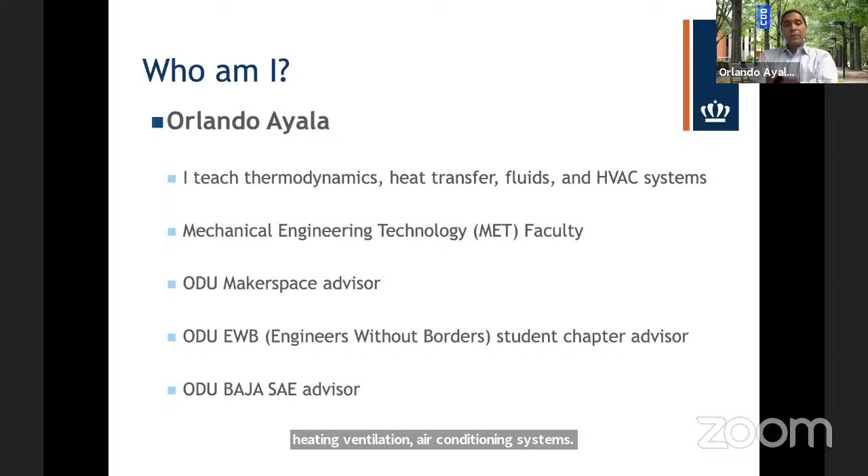So who am I? Like I said, I'm an associate professor at the Engineering Technology Department. I am a mechanical engineer by training. What do I do here? I teach thermodynamics, heat transfer, fluid mechanics, and HVAC systems - heating, ventilation, and air conditioning. I'm part of the MET faculty, the Mechanical Engineering Technology faculty. And I'm proud to say I'm also advisor of some nice student organizations at Old Dominion University: the Makerspace, Engineers Without Borders, and the Baja SAE. I'll tell you more about those three in a second.

I've been blessed in my professional life to be involved in so many areas of application of engineering. I'm faculty right now, so I'm dedicating my life to the academic side, but I used to work for a company - a consulting company. I used to work in the industry, so I know exactly what goes on there. I was trained as a mechanical engineer, did my master's degree, and got my PhD in 2005. I went to work in industry for several reasons, and I had the nice opportunity to use what I learned there. When I teach my classes, I always try to bring all the experiences I had in the industry.

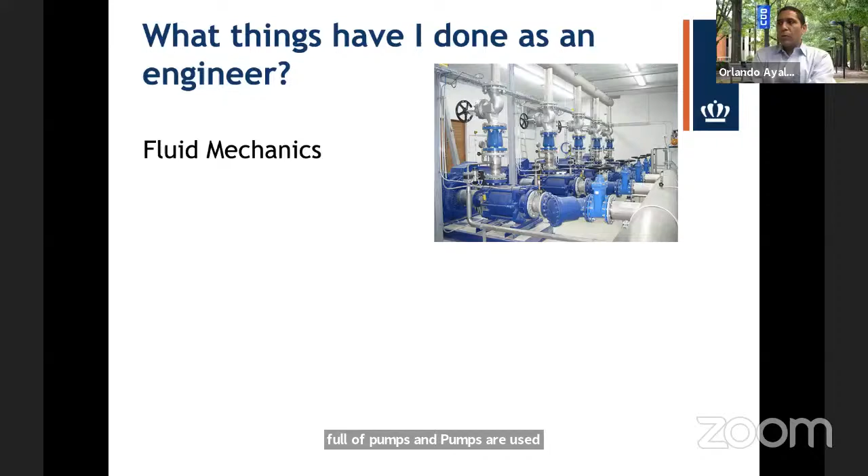On the fluid mechanics side, I design things like the ones in this picture. That right there, you see a room full of pumps, and pumps are used to move fluids from one point to another. Everything you see in that picture, although this is not my own project, we design - in my time working for the consulting company.

One of the coolest projects I was involved with was a large swimming pool we were hired to design. We work alongside architects, civil engineers, electrical engineers, and so on to design a very large swimming pool. The larger the pool, the more mass of water you have to move, the larger the pumps you will require. I don't know whether it was built or not, but I designed the swimming pool.

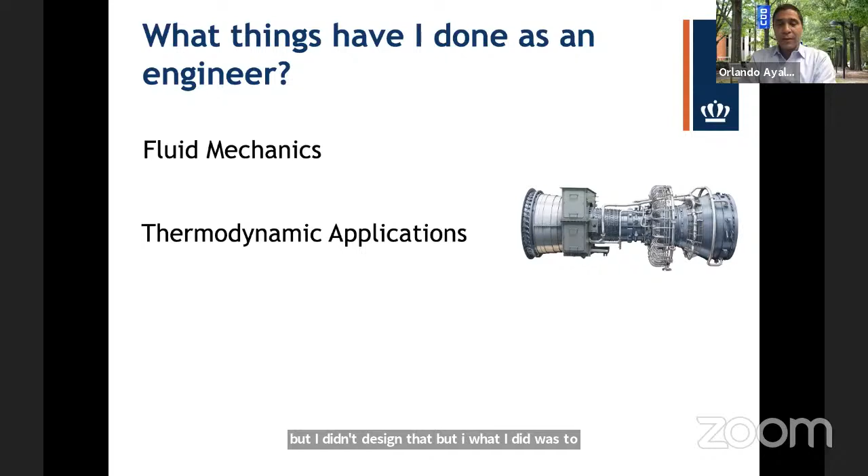That right there is a turbine, the same turbines we use in an airplane. But I did not study the turbine in an airplane, what I did study was a turbine in a power generation plant. I looked at the performance of that turbine to see how it was working, to detect any possible current or future failures. Because when equipment is about to fail, there are parameters that change, and if you read them ahead of the game, you could prevent the failure.

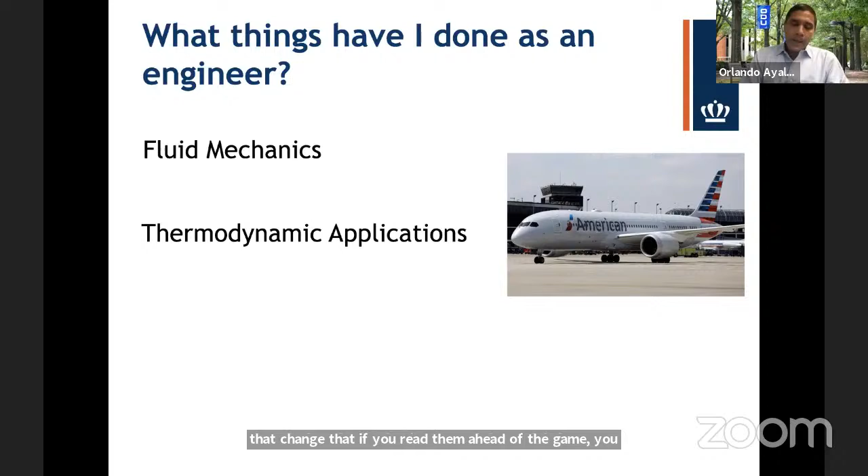Similarly, I also look into engines, but not the engines of a car. By the way, the fact that I am a mechanical engineer doesn't make me capable of fixing my car. I don't know how to fix my car, I know how it works but not how to fix it - we need a mechanic for that, they know much better than I would. I did not study the engine of a car, but I reviewed the performance of an engine in a particular plant in the industry I was working on.

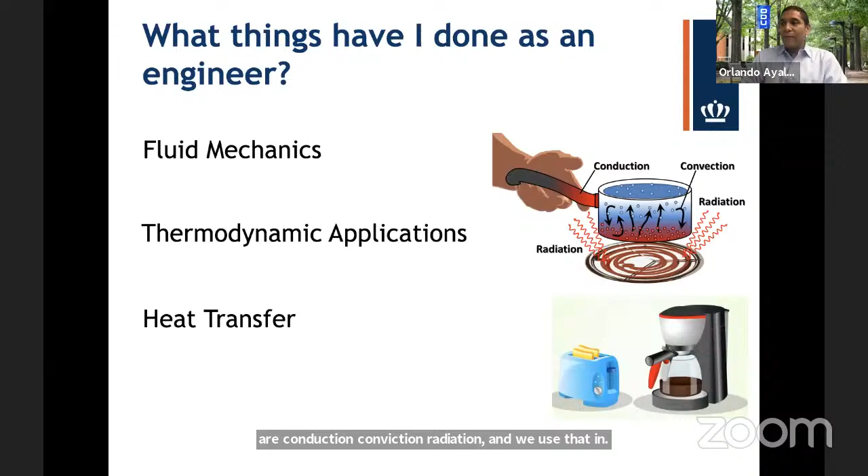Another side of my expertise is heat transfer. Many of you might have heard about the different heat transfer phenomena: conduction, convection, radiation. We use that in common things in our house, and in cooking heat transfer is extremely important. But the one I have dedicated a lot of my time to is computing the heat that could go into a house during summertime.

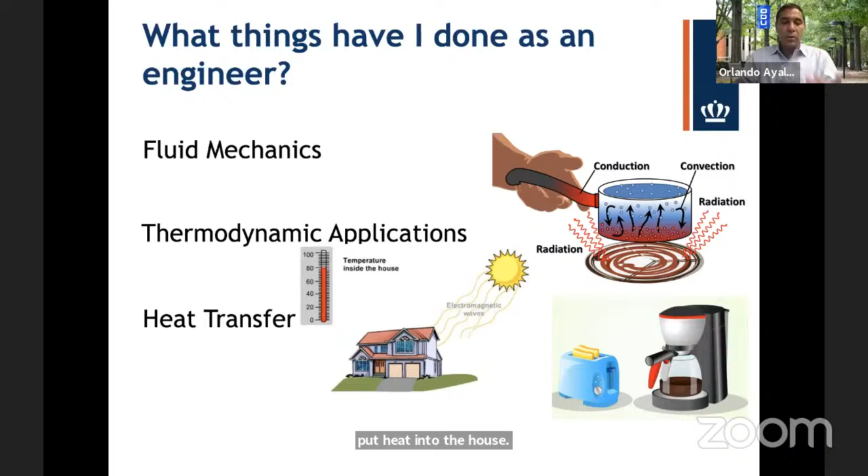If it's summer and really hot outside, we want our house to be cool. But nature will put heat into the house, because heat always goes from high temperature to low temperature. So this is where an air conditioning system comes into place, to remove that heat that Mother Nature puts in the house.

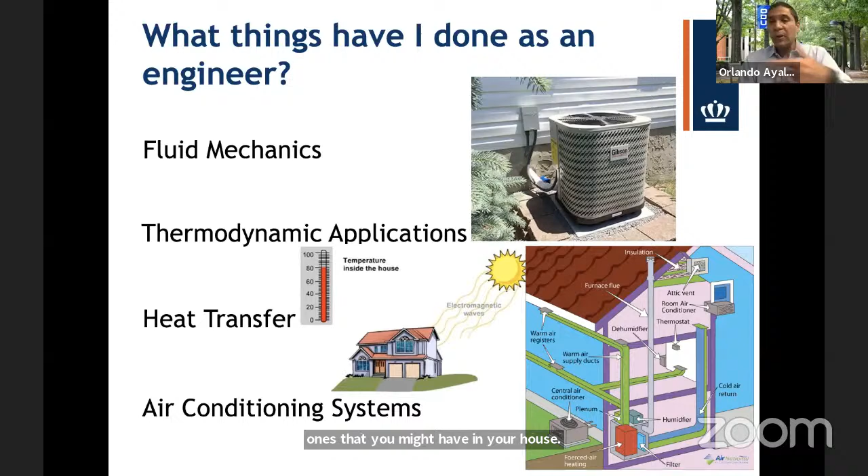So in my engineering practice, I have also designed systems of this kind, the ones you might have in your house. Anyway, those are the things in general that I've done in my life as a professional mechanical engineer.

What have my students done? What do they do while going through their careers here at Old Dominion University? Well, I advise 3 student organizations that I'm so proud of: Engineers Without Borders, the Baja Car Club, and the Makerspace. Let me start with the Makerspace. I'm broadcasting from the Makerspace, by the way, which we call the EMIC.

In the Makerspace we have a huge space with lots of equipment the students can use to fabricate and create things. The idea is for students to come here, come up with their own ideas, design them, and make them - that's the word Makerspace. We have 3D printing, a metal area, a wood and composite area, a welding area, and an electronics area. We have any sort of equipment students could use for free to build their ideas.

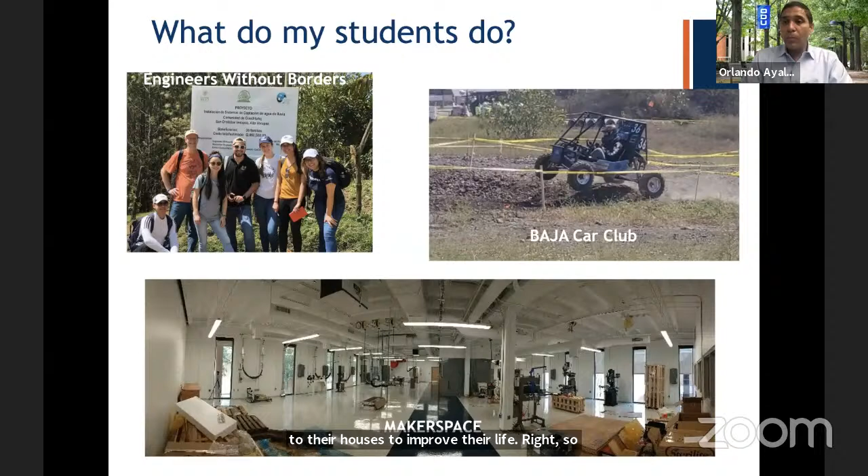So what we're doing is designing a pump system that can take the water from that source directly to their houses to improve their life. That's what we're doing around here, at least my students, with my advice.

Before I go into the class, I gave you my background, and now you know me a little bit better. Let me tell you something I'm going to come back to every now and then as we go along in this class: engineers are designers and/or inventors. We could be inventors and we design the invention. One thing is to invent something, coming up with an idea—the light bulb goes on.

That's an idea that you need to design. So not only do we as engineers come up with that idea, but we also design that idea. We make it happen. That's why we are designers and inventors. Now, what is important to recognize here is the following.

Scientists study how Mother Nature behaves, and they come up with mathematical equations, mathematical models. That's their job. We as engineering practitioners don't develop equations—what we do is use those equations that scientists came up with. Whatever they learn from Mother Nature, we use that to our advantage because we want to fool Mother Nature through devices to improve our life.

Like, for instance, the air conditioning system. A scientist found out—by the way, his name is Fourier—many years ago, that heat goes from high temperature to low temperature. He developed some equations to quantify that amount of heat.

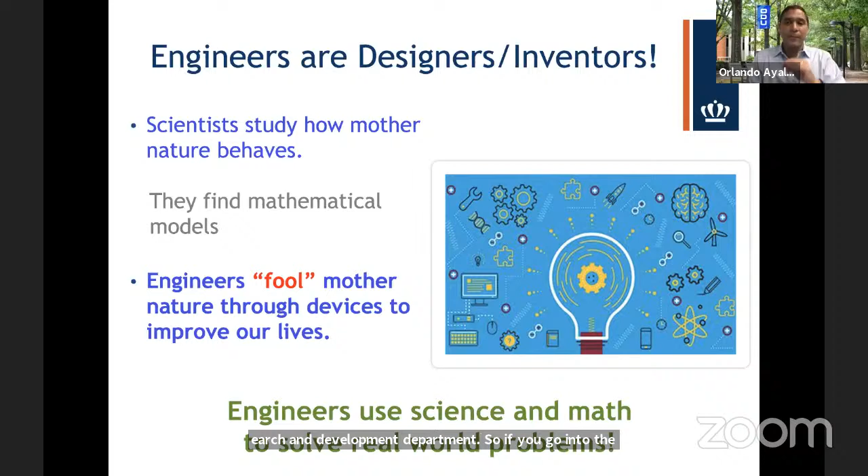There are many companies that have research and development departments. If you go into a research and development department, you are an engineer that goes more into the scientific side—you could also come up with equations if you like, spending your life studying Mother Nature. Or you could go into the industry just to solve problems.

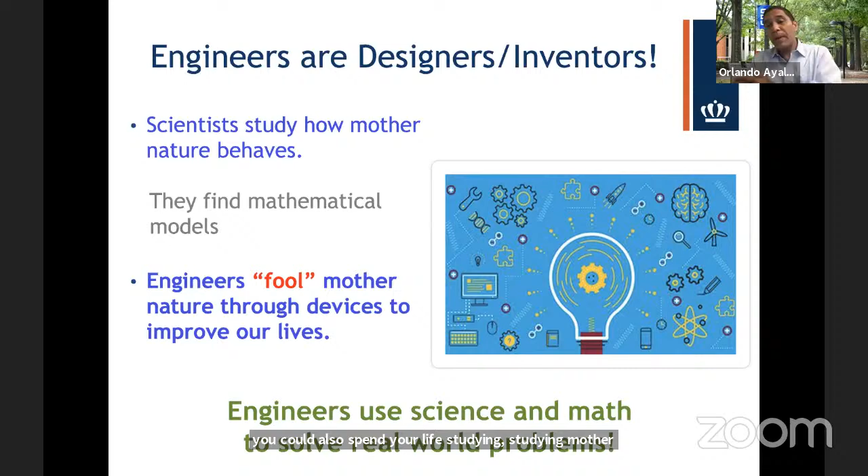By the way, this whole thing of solving problems is always based on the engineering design process, which starts by defining the problem, then planning solutions. When you plan solutions, that's when you use the knowledge scientists came up with. Once you prepare a solution on paper, you build a model, test the model, and then reflect and redesign that model. By looking at the problems you found in that preliminary model, you create another iteration.

You define another problem, and once again, go plan solutions. By the way, this whole engineering design process, that's what we want to happen in the makerspace.

One thing I forgot to mention about the makerspace: that space is run by the students, for the students. I'm the advisor, but they are the ones coming up with everything in this space. They decide what to run, what to do, what not to do. Of course, they're always in contact with me to make sure everything is within certain constraints, as anything in life, right?

So let's go into the class agenda. First, I'm going to talk about fluids and their properties—very generic concepts. If you have any questions, please let me know. We're going to talk about pressure, one property of fluids, and how pressure behaves in a static fluid. We're going to talk about buoyancy force, followed by the stability of bodies that are submerged or floating. Finally, we'll talk about the difference between theoretical and experimental work, collecting data, processing data, and homework.

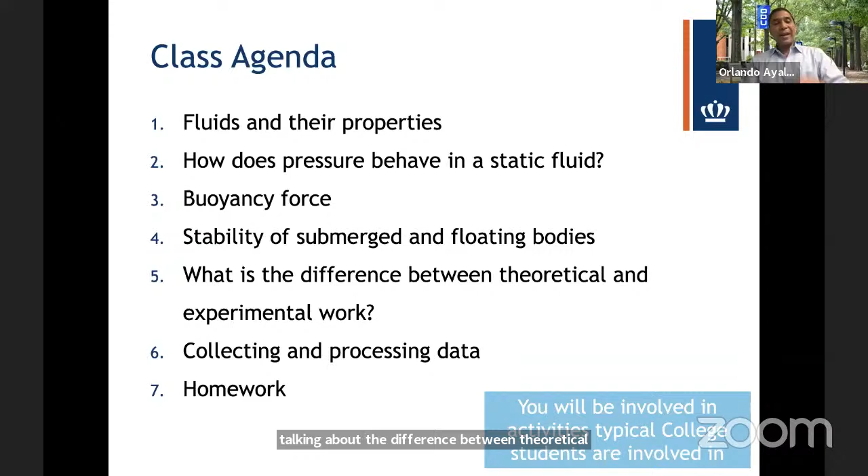The last three items are related to the homework assignment, which you might want to get involved in or not—it's up to you. I'm going to give you access to a virtual lab that we created here at Old Dominion University, and it's up to you whether you continue with the homework assignment. I think it's a great experience if you go through that. We won't have time to cover that today.

You've got to do it after class, but I really encourage you to do so. At the end of the talk, I'll give you my email, so if you have any questions on the lab, if you decide to go for it, I'll be happy to address them.

At the end of the day, what I'm doing today with you is getting you involved in typical activities college students are involved in. I want you to see what it is that students do here through my classes, for instance.

Okay, now let's start with fluids and their properties—first and foremost, the basics. I'm going to read a very fancy definition of what a fluid is. It might not make sense to you, and that's fine, but this is the original, base definition: a substance that continually deforms or flows under an applied shear stress, regardless of the magnitude of the applied shear stress. I highlighted shear stress because that's a very fancy word, among many others in this concept.

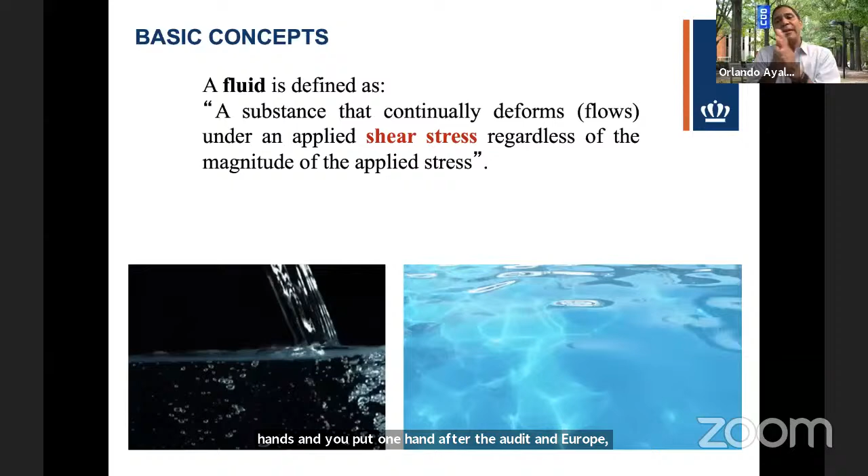But shear stress is something you can think about simply. Just grab your hands, put one after the other, and rub them against each other—you start feeling heat. If you keep moving your hands, you feel heat in the palm of your hands. That heat comes from friction, and that friction comes from a shear force. That's shear stress—that parallel motion you feel in your hands is what we call shear force or shear stress.

That kind of motion, parallel to your hands, is the type of motion that makes a fluid deform. And as it deforms, it moves like in the little videos in my presentation right there.

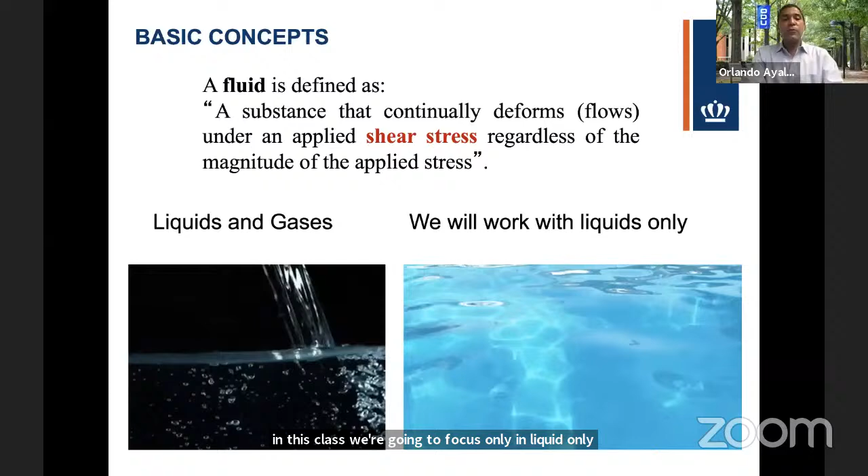So a fluid could be a liquid or a gas, but in this class we're going to focus only on liquids. I'm not going to talk about air—I'll just focus on liquids. That's all.

Let's start with this very important concept in fluids: pressure. This guy, Pascal, in 1653, came up with this relationship between force, pressure, and area. You might not know what pressure is, and that's fine, but you know what force is, and you know what area is. Happens to be that if you divide force by area, that gives you pressure. Pascal found that in 1653, though he published his work in 1663.

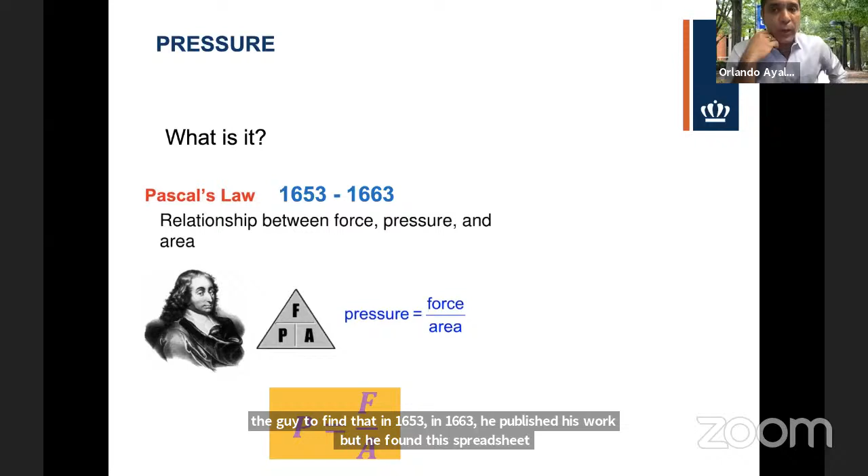As you can see, a long, long time ago—but such a powerful equation. He was studying nature and found that equation, and it happens to be that we use it a lot in engineering. But what is pressure? Well, pressure is more related to molecular motion, how molecules behave. So pressure is related to how fast those molecules collide with each other.

How fast those molecules hit the walls - the faster they hit the walls, the higher the pressure. Think about the molecules hitting the palm of your hand. The faster they hit your hand, the more you're going to feel something in your hand, right?

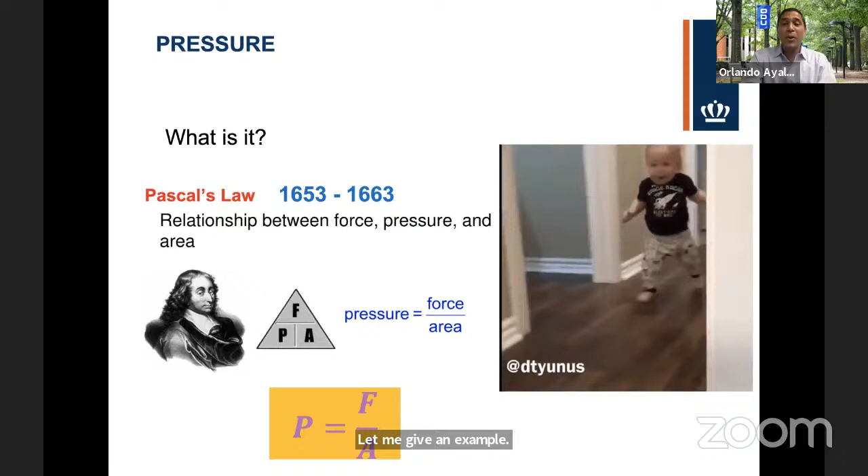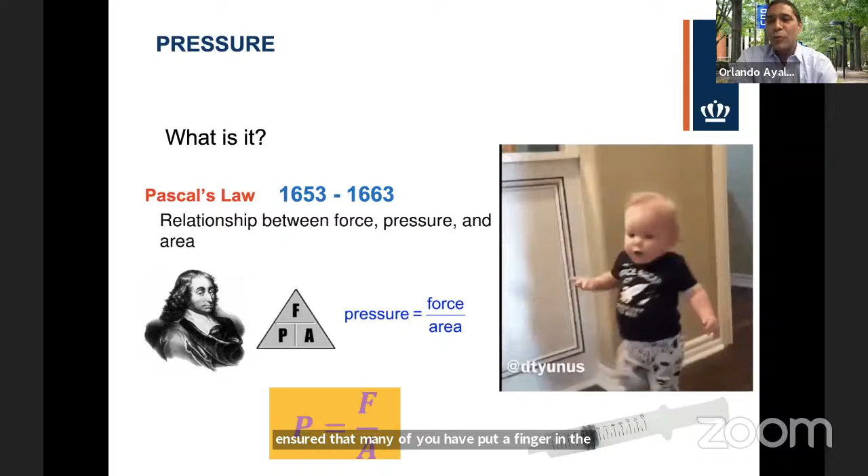Let me give an example. I'm sure many of you have put a finger on the tip of a syringe and tried to move the plunger. You know what happens - you start feeling something in the tip of your finger. So what are you doing? Let me go back to this video, because I want to say one more thing about this.

If I want to increase the amount of collisions of those molecules against a wall, there are two best ways to do so. One, increase the temperature of that volume. If I increase the temperature, the molecules will move faster, and by moving faster, I'm going to get a lot more collisions.

But the other way, which is the one I need you to remember for this class, is by reducing the volume. If I reduce that volume to a quarter of it, keeping the same amount of molecules, I'm forcing the molecules to move shorter distances. And if they move shorter distances, they must collide a lot faster. So that's why reducing the volume will create more pressure.

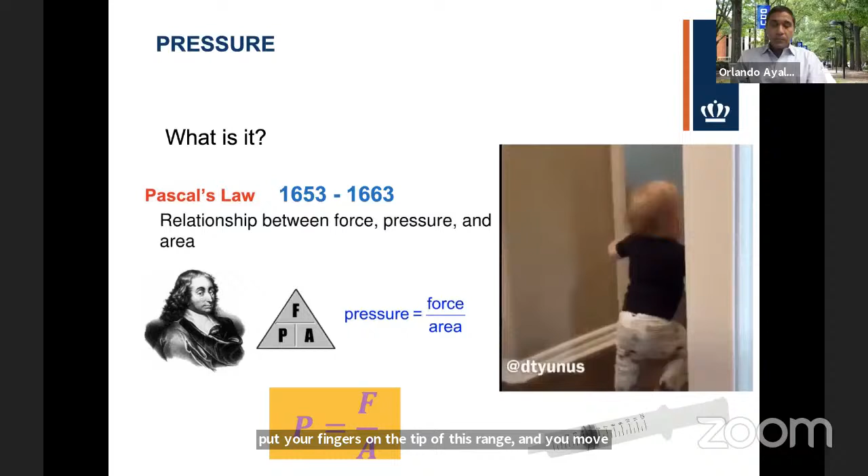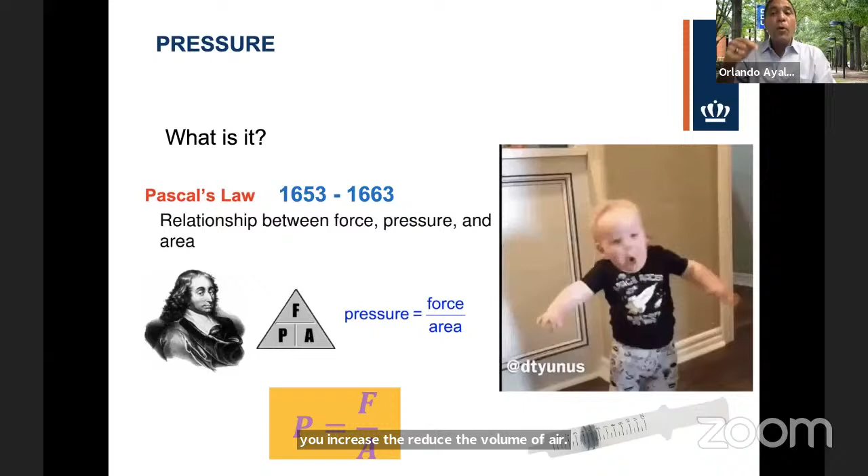Going back to the idea of the syringe, when you put your finger on the tip of the syringe and move the plunger against your finger, you are trying to reduce the volume of air. And when you reduce the volume of air, knowing you have the same molecules inside, the molecules will tend to hit your finger faster. That's related to high pressure.

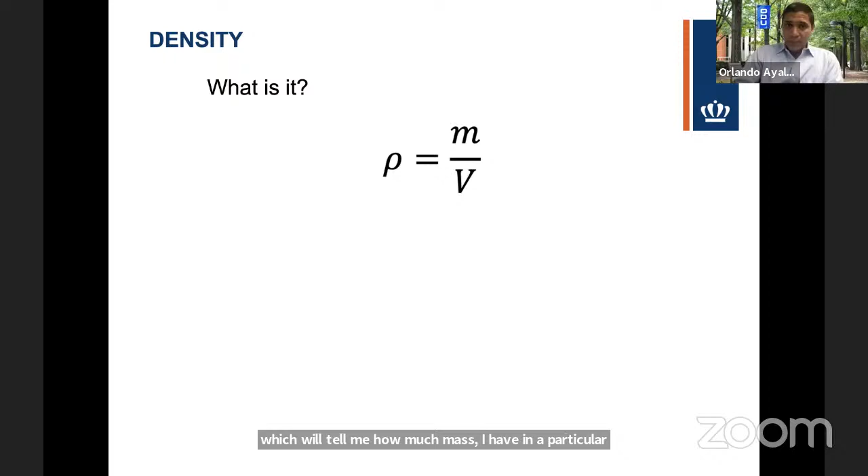Related to density, I have weight. Weight is something related to gravity on Earth - weight is nothing but mass times gravity. Weight is equal to mass times gravity, and weight is another form of force.

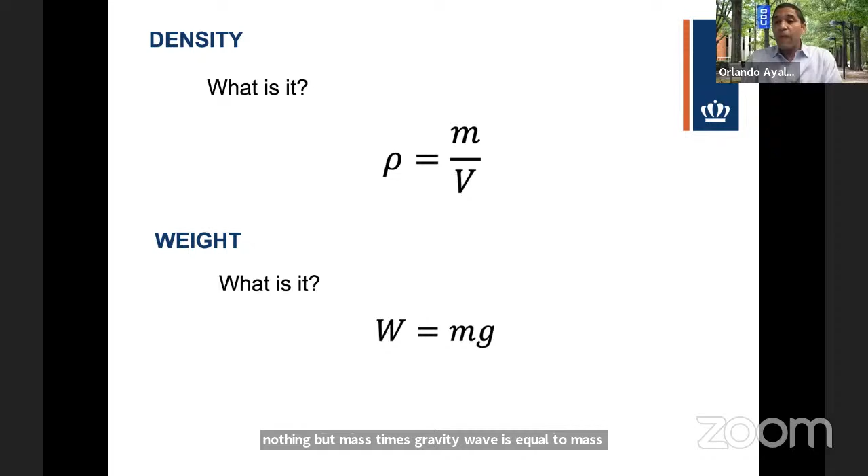Keep in mind that pressure is related to force. Remember, pressure is equal to force divided by area, meaning that if I have a force applied to a fluid, I have a pressure. Also, that means that if I have a pressure in a fluid, I have a force, or I can use a force. So that's one form of force.

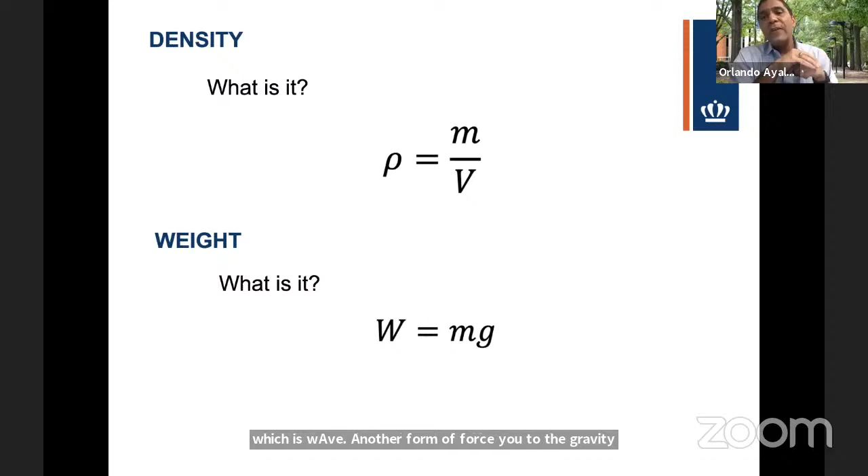And here's another one, which is weight, another form of force due to gravity, due to the fact that we live on Earth, and Earth is trying to pull all matter into its center. That's what gravity is.

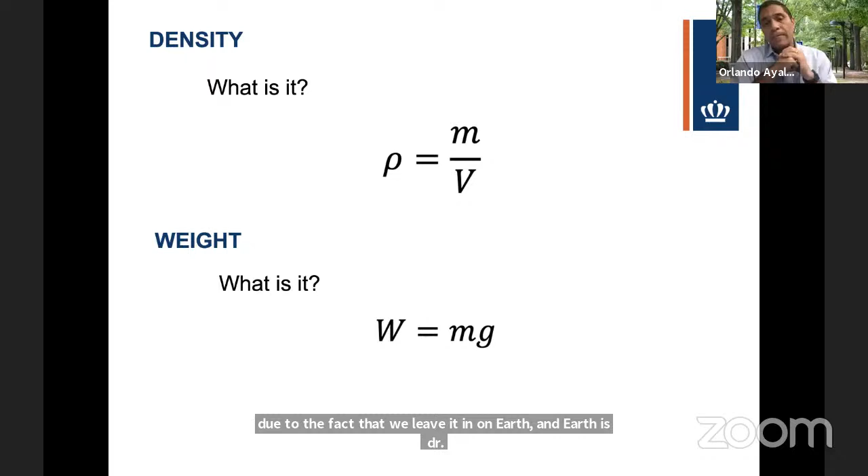Now notice that density has mass right here, and that I have weight. In the weight I also have mass. Well, if I get the mass out of this equation, that'll be density times volume. I plug it in here, and I finally get that weight is also equal to density of the fluid, gravity times volume. And please, write these equations down, because we're going to need them for something later on.

What am I doing with you? I'm manipulating equations. Remember, what do we do as engineers? We use science and math. So on this part of my class, I'm dealing with the math. It's not a big deal, not a humongous amount of math that we need to deal with. Just hang in there. It might be boring at times, but we're going to get into very interesting results. I promise you that. So hang in there, and let's keep taking a look at these equations.

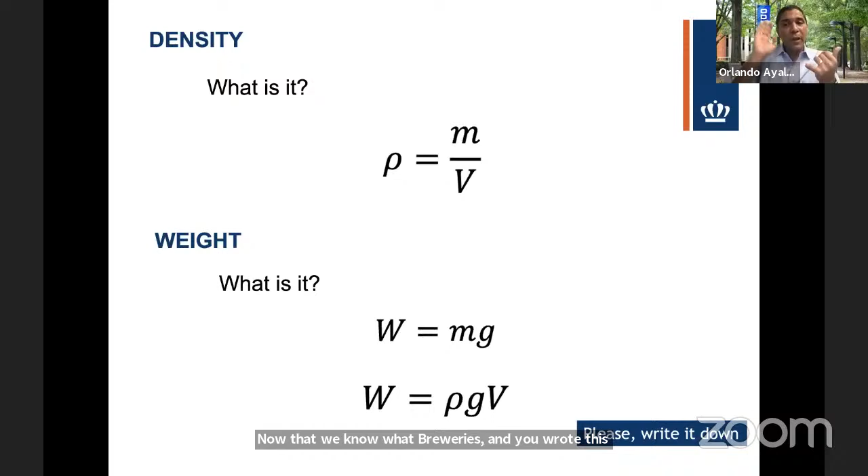Now that we know what pressure is, and you wrote this equation, let me give you a few more seconds to write this equation. So write the equation for pressure, which is P equals F divided by A, force divided by area. Then density is equal to mass divided by volume. Then weight is equal to mass times gravity, or is also equal to density, gravity, times volume.

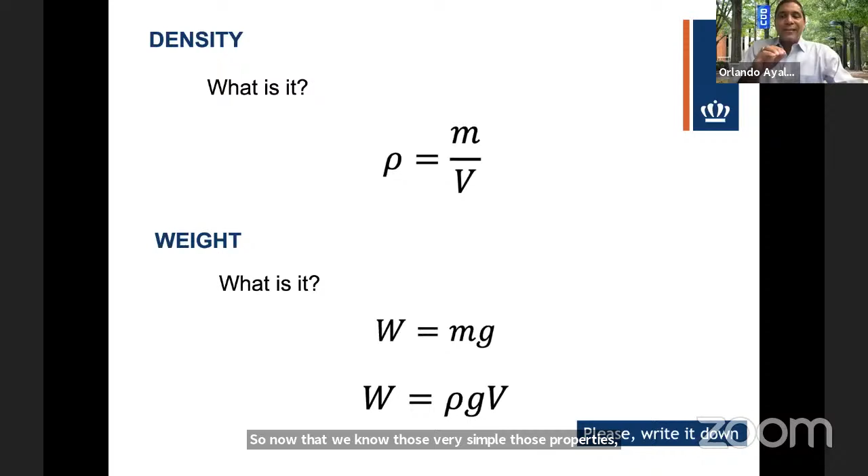So now that we know those very simple properties, those are not the only properties of fluid, but those are the properties that I'm interested in introducing to you today. Let's talk about pressure. How does pressure behave in a static fluid? We know what pressure is, but let's see how that behaves in a static fluid. And why might I be interested in that? Because I might be hired to design an aquarium.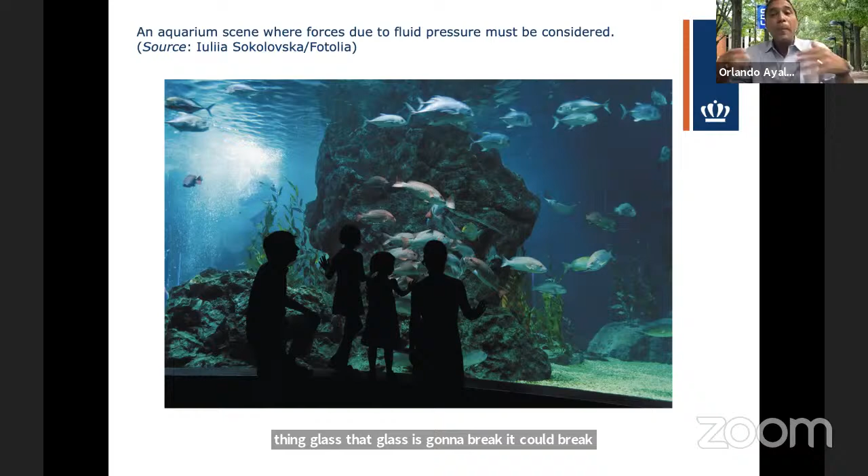I need to know the pressure so I can compute the force that the water is exerting against the glass in that aquarium. And I need to know the force. Why? Because if I don't know, that glass could break. I know that if I put a very thin glass, that glass could break. So if I know the force produced by the pressure of the fluid, I can decide and design the thickness of the glass. So that's why it's so important.

And see, once again, it comes from a concept that Pascal developed 500 years ago. From that relationship we could use that relationship to be able to design an aquarium. Once again, engineers use concepts that scientists came up with.

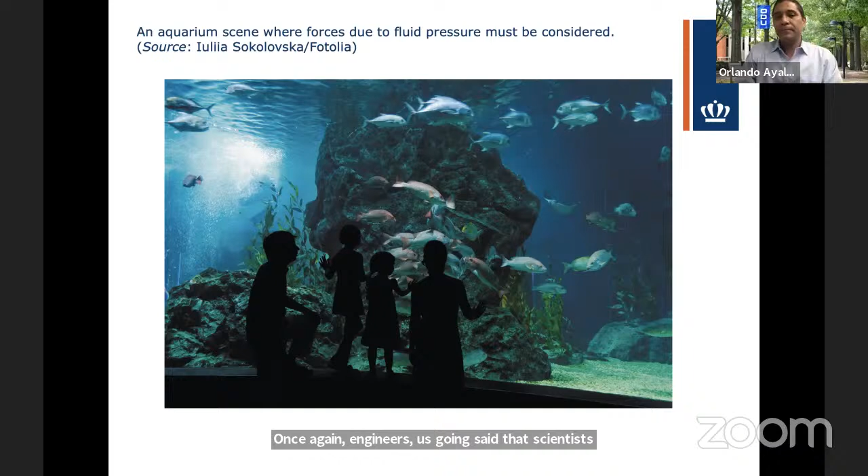Now let's see how that behaves. And you know the importance of that pressure, why it's important to look into that. But let's see how pressure behaves in a static fluid. So many of you, if not all, have been at the bottom of a swimming pool. You have dived into a swimming pool. And if you go to the bottom of the swimming pool, depending on the depth of the water, you might even feel a kind of noise in your ears. And you always say, oh, it's due to pressure, the pressure of the water. Well, I want to get with you into that phenomenon of the pressure of the water.

So the question is, can we compute the force at the bottom of the swimming pool? And the answer is yes, we can do that. How can we do that? Well, let's say I'm floating on the surface of the water. If I'm floating on the surface of the water, I don't feel any force. But as soon as I go to the bottom, I feel a force. So if there is a difference between me floating and me being submerged at the bottom, that difference has to be due to that mass of water. Because the only difference between me being at the surface and at the bottom is the water. It is just the water.

So if you keep thinking, if it is the water, then that force must be related to the weight of the water. So the force that I'm feeling, or the force that the bottom floor of the swimming pool feels, is equal to the weight of the water. Now this is what I need you to do. Go back to the 3 equations that I told you to write down and look at the equation for weight, the second one. What am I going to do? I'm going to plug in that equation into the W we have in this relationship I just found. So weight is equal to density times gravity times volume.

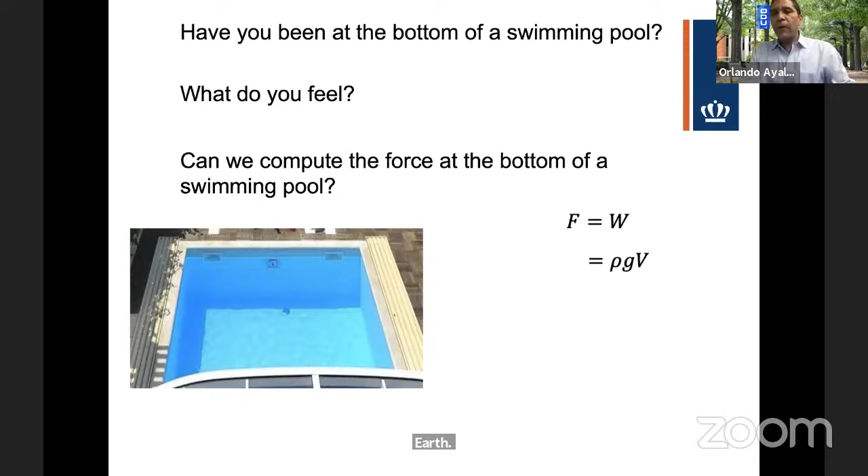But volume, I need to find another equation for volume. What's the volume of that swimming pool? Well, that volume is related to the area of the bottom surface and the height of the water. Volume is nothing but the multiplication of that area times the height. That's volume.

Now look what I'm about to do. I'm going to move this area right here to the left-hand side. Since it's multiplying on this side, it's going to go to the other side dividing. And this is what I get: force divided by area is equal to density, gravity, and the height of the water.

Here's what I need you to do. Go back to the equations I told you to write down, and you're going to find one equation that has force divided by area.

Professor, we have a couple of questions. Oh really? Cool, so shoot them out.

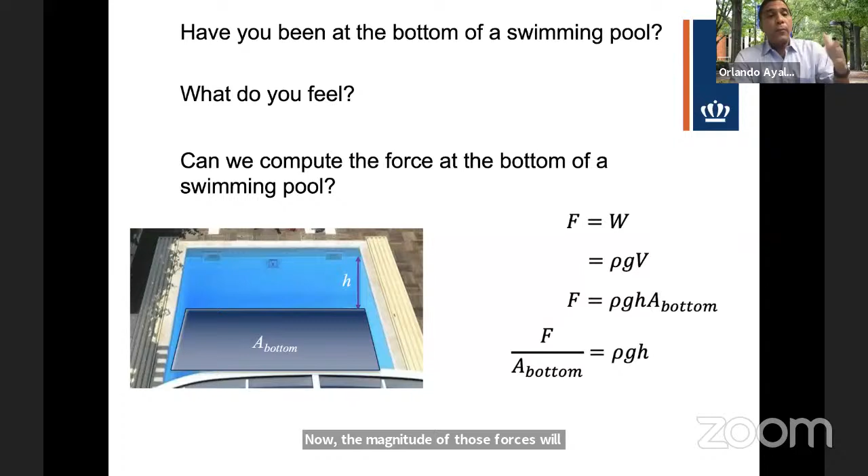From Jackson Shelton: the pressure of the fluid is the force applied to all sides of a container, correct? That's correct, Jackson. Now, the magnitude of those forces will depend on the area, and it would also depend on what side you're referring to, because the bottom side, like in this swimming pool, is different from the lateral walls. The lateral walls discussion is a little more involved, which I prefer to leave to another class. But yes, you're right.

The answer is yes. And from Kelly Ferguson: is force always equal to weight? No, it's not always equal to weight. But in many cases, specifically for statics of fluids, that's the case. It depends on the case. In this case it works, but it's not always like that, especially if the fluid is moving. If it is moving, then other kinds of forces show up.

Any other question, Tyler?

We have one asking about as we decrease volume and pressure is increased, is it related to the ideal gas law? Yes, definitely. But what happens...

And who was this person? It was anonymous.

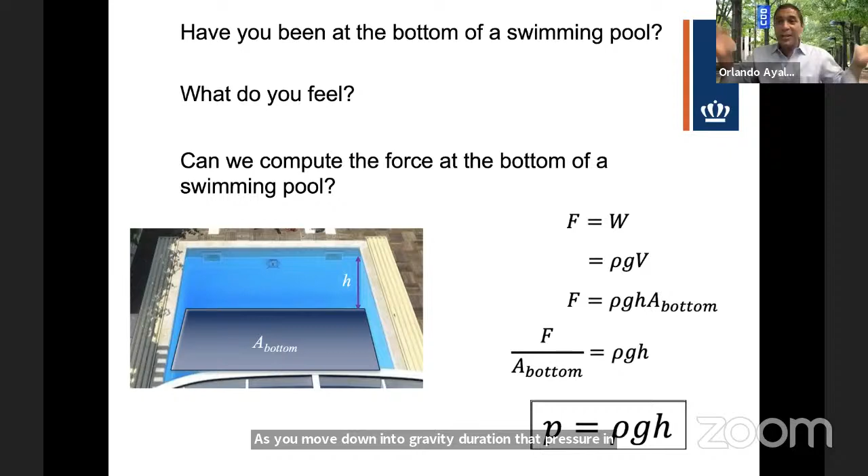Notice the following: pressure increases as you move down in the liquid in the gravity direction. It's true. And as you move up, the pressure in the liquid reduces. So important: if you move up, you are decreasing pressure. If you move down, you're increasing the pressure.

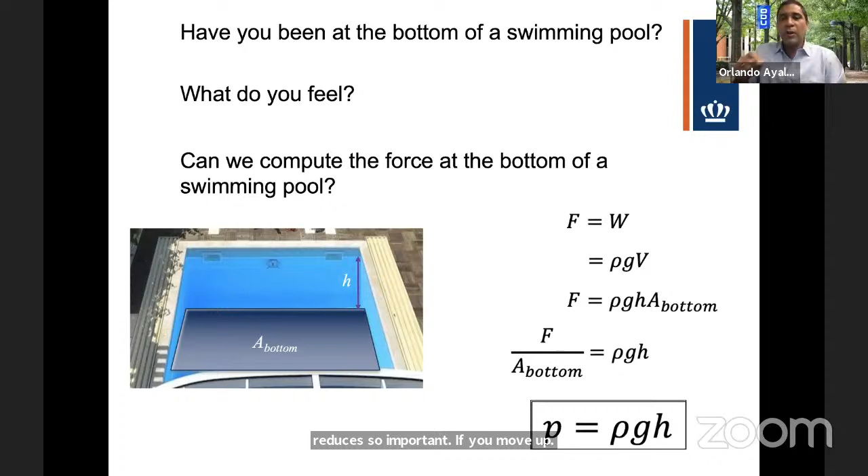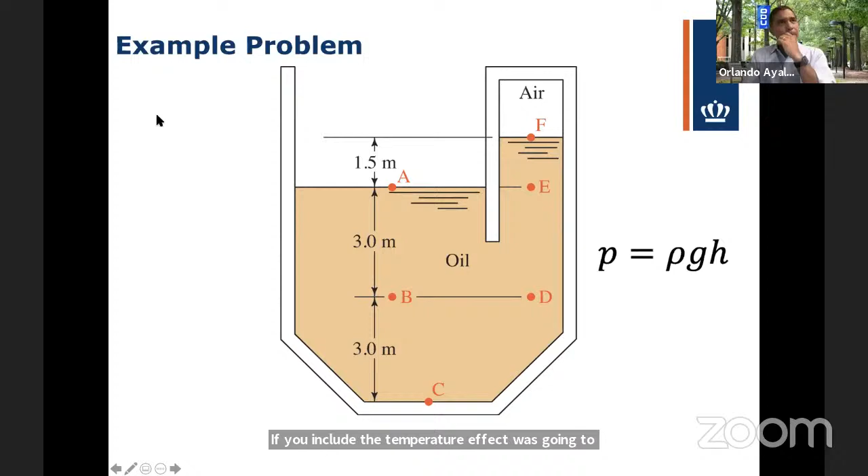Excuse me if I get this name wrong, but Ahmed Mikawe asks: pressure increases while moving down, does that mean temperature increases while moving down? No—what I just explained assumes the temperature is uniform everywhere. Good question, I forgot to mention in this class we'll deal only with constant temperature. If you include temperature effects, the density will be affected, but I don't want to deviate from the concepts I wanted to teach today. Temperature is not playing a role here; it's constant, and in a liquid that does not change, the temperature remains the same.

This next one is just a confirmation of the topic—excuse me if I get this name wrong, Syed Gul: the pressure increases as you move down because it'll be the pressure of the water plus the atmospheric pressure. Yeah, exactly, you got it right. And it's pressure of the water—you might also be referring to weight. It's true, it's all related.

And then the last one, from Malin Ranjan, apologize if I got that incorrect: what would the unit of pressure be for this equation? It depends on the units you use for density, gravity, and height. If I'm using the typical international system of units, pressure will be in Pascal—the same dude I told you about before, right? Pascal, he was the one to define what pressure is for the first time, 400 to 500 years ago.

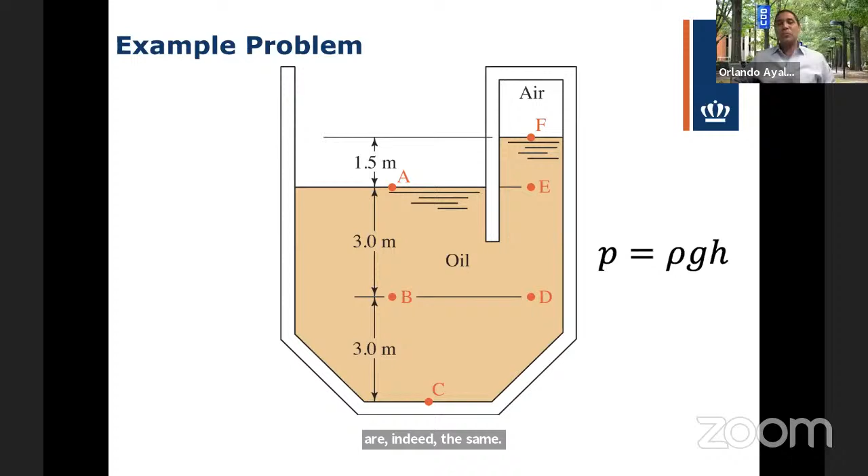So as I was saying, and confirming through questions from some of you, pressure only increases if you move vertically. If you move horizontally, it doesn't change. That means pressure at B and pressure at D are the same. And if you agree with that, you must agree that pressure at A and pressure at E are also the same, and indeed they are. It's amazing, but it's true. Those two pressures are the same because they're located at the same height.

Now if I go to F, the pressure at F must be lower than the pressure at E. Because pressure increases if I move down, but decreases if I move up. So if I'm at E and keep moving up, the pressure at F must be lower, meaning that the pressure of this trapped air is lower than the pressure at A, which could be atmospheric pressure.

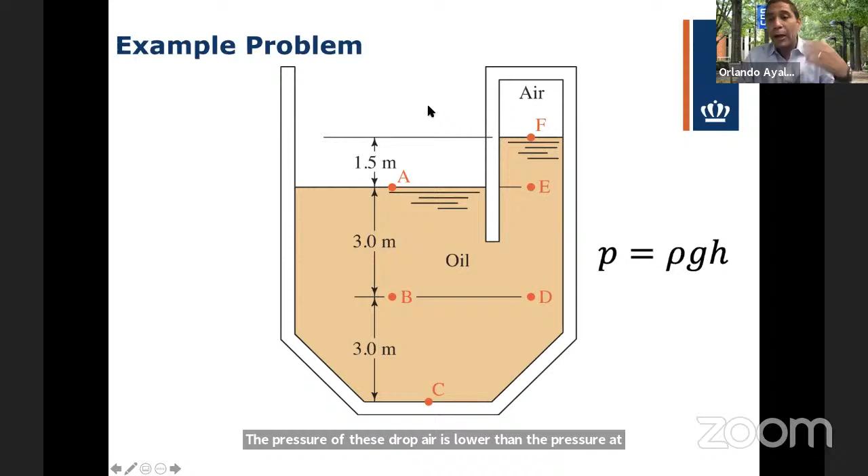You know this phenomenon because many of you have drunk soda from a cup using a straw. So what are you doing from the fluid mechanics perspective when you drink soda with a straw? What you're doing is creating a lower pressure in your mouth, also known as sucking. When you suck, you're creating a pressure in your mouth that is lower than the pressure in the ambient. That pressure differential makes the fluid move towards your mouth. That's it, that's all you're doing, lowering the pressure in your mouth.

Please write this other equation down because it's very important for the next session: pressure behaves as density times gravity times elevation, okay?

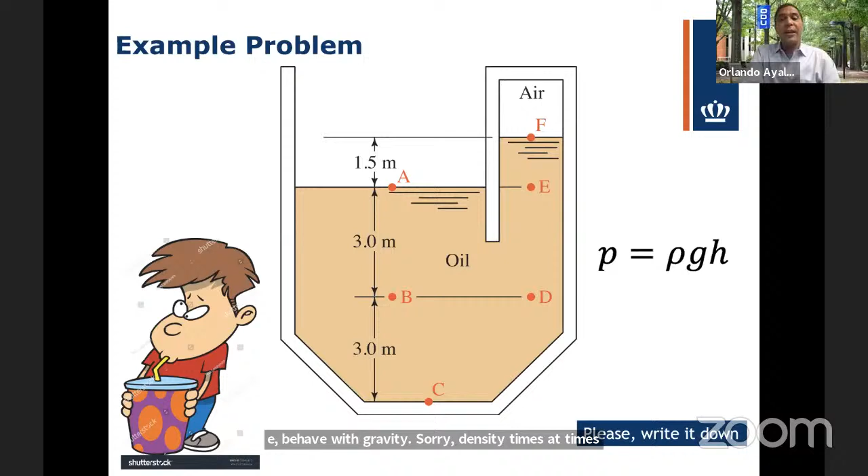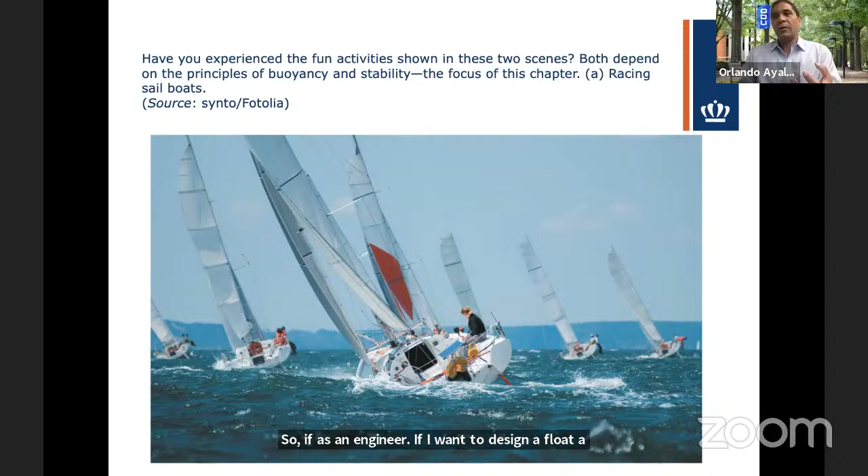So with that said, let me get into the force that I wanted to talk to you about. So half an hour talking to you about background, finally we're here. Let's talk about buoyancy force and the stability of objects feeling a buoyant force, okay? Why is that important? Because buoyancy forces are the ones that keep our boats floating. So if, as an engineer, I want to design a boat that floats without sinking, without failing, then I must know about buoyancy force. And you guessed it, if I spend a whole lot of time talking about pressure, it means buoyancy is related to that. Let me prove that to you.

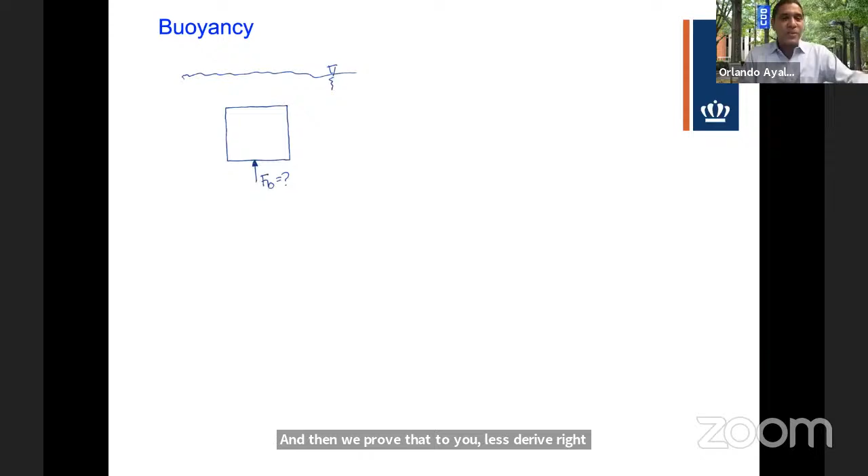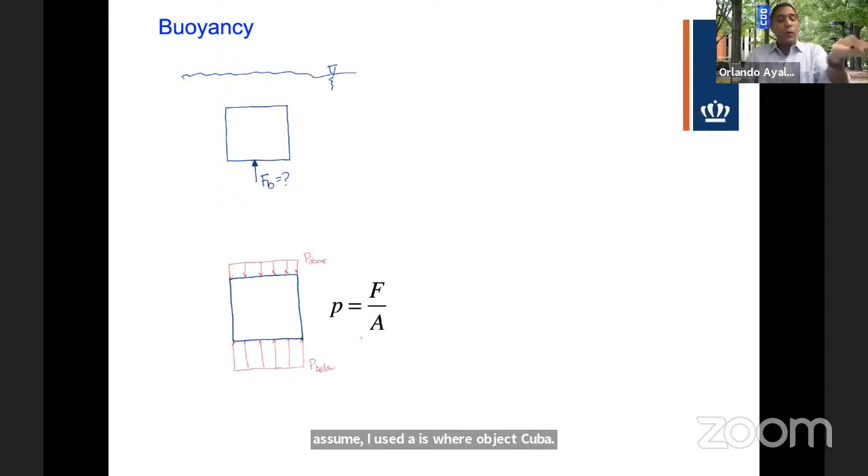Let's derive the equation of buoyancy. So notice, if I have an object, which conveniently I assume is a square object, a cube—that's just for convenience, I could have done it with any other shape, but I'm using a cube for convenience. Now what happens is the cube will feel a pressure at the bottom that is larger than the pressure at the top. Why do I know that?

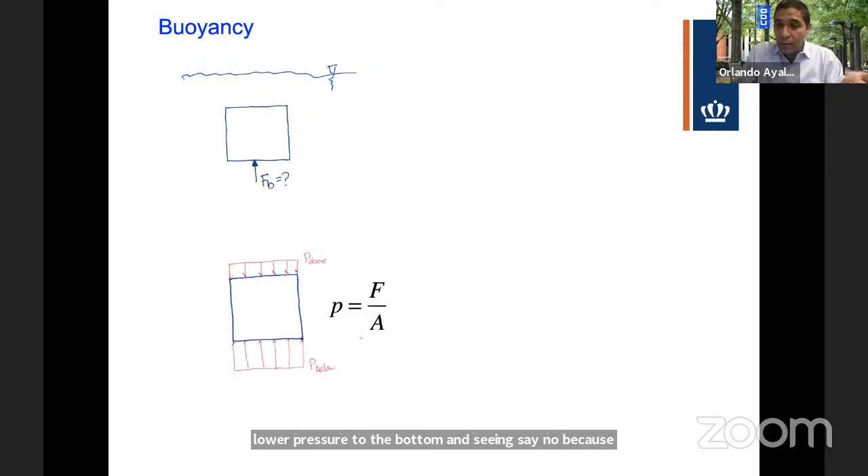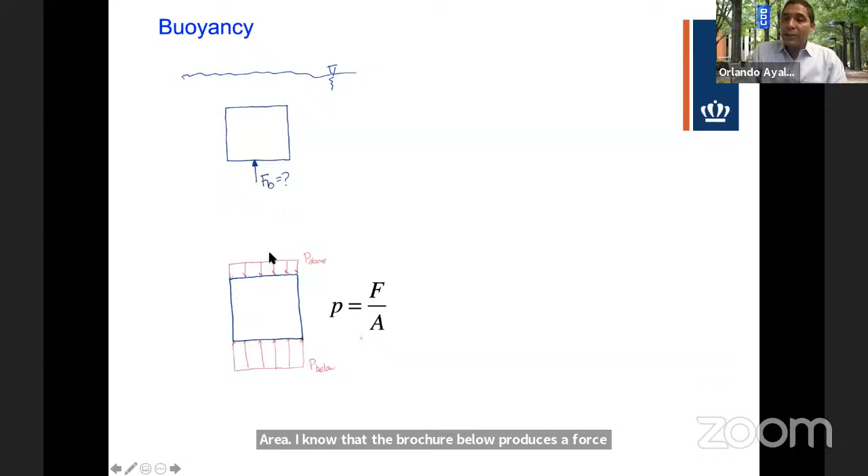Because pressure depends on density, gravity times elevation, and I know the deeper I go, the larger the pressure. So I have a high pressure at the bottom and a lower pressure at the top. And since, because of Pascal, pressure equals force divided by area, I know that the pressure below produces a force larger than the force at the top. So the net force is equal to the force at the bottom minus the force at the top, and those forces are due to pressure.

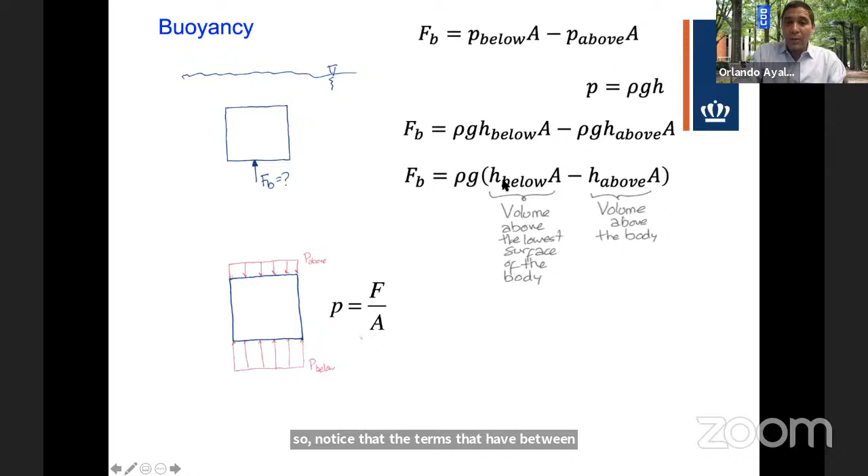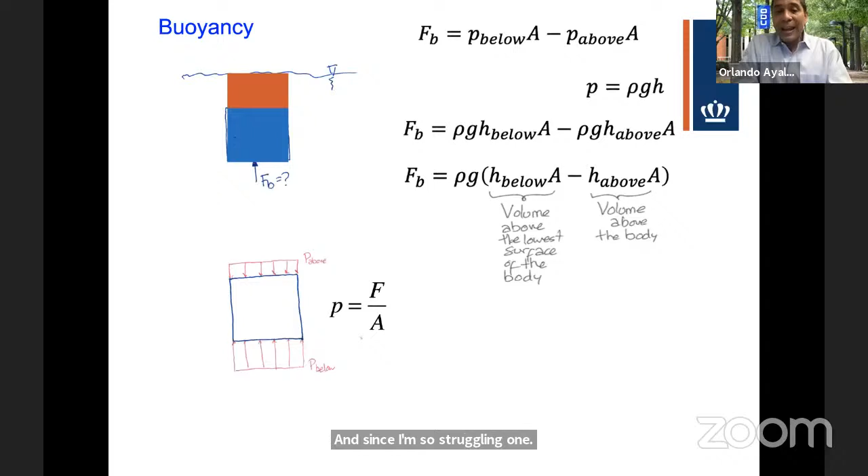Notice that the terms I have between parentheses are volumes: the first term, H below times area, is nothing but the volume above the lower surface, this blue volume here. And H above times area is another volume, above this volume right here. Since I'm subtracting one from the other, the net volume I get is this, and that is the volume of the object. This is what I get: buoyancy force is equal to density times gravity times volume.

At this point, I want you to look at the equation for weight that I asked you to write down. I'm sure you just noticed it's pretty much the same equation, but I can tell you no, they're different. They look the same, but they're not the same. What's the difference?

The difference is the density. For the buoyancy force, the density is the density of the fluid surrounding the object. For weight, the density is the density of the object. So density is key, and also could be the volume. Let's talk about that in a second.

We have a couple of questions, Professor. Go ahead, Tyler. The first one is from Said Gould: what if there is a pool in space, like in the International Space Station? What would the pressure be for that pool?

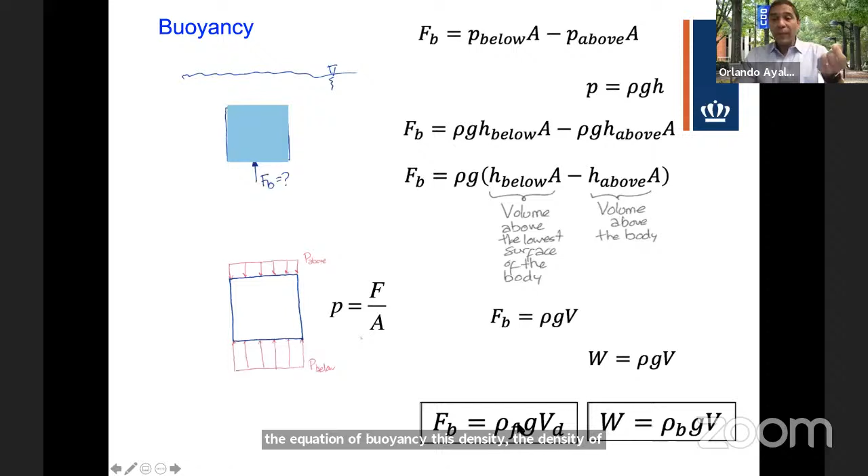The main difference is that even though they look alike, there are two main differences. One, for the buoyancy force, the density is the density of the fluid. For the weight, the density is the density of the object. Once again, for the buoyancy equation this density is the density of the fluid, whereas when computing weight, the density is the density of the object. Those are two different materials.

There could be another difference, and I'm gonna go back to that, but I'll make it clear that there could be one, related to the volume. If the object is fully submerged, then those two volumes are the same. The volumes right here, boom, this one and this one — if it is fully submerged, those volumes are the same.

But if the object is not fully submerged, then the volume is what we call displaced volume, and we call it V sub D. I'm gonna get into that in a second. This volume is the volume of the full object. So those are the differences.

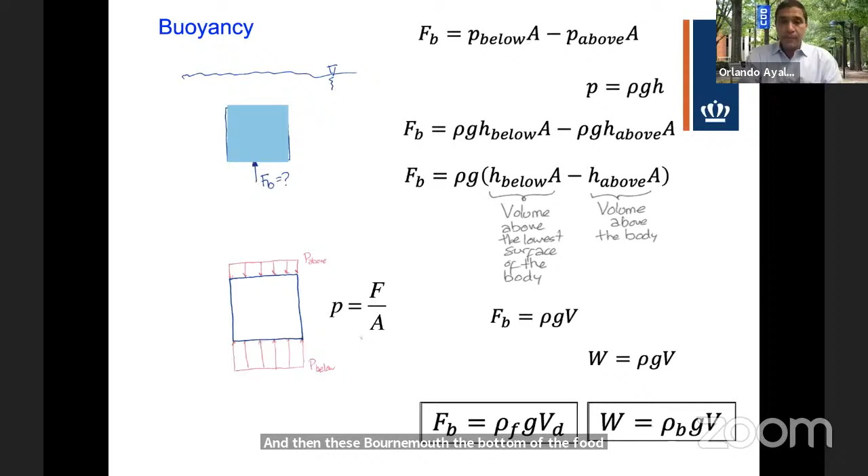Now, there was a question about Archimedes. Tyler, yes, you were gonna say something. Yes, one of our participants asked what the subscript D for V in the equation for FB stands for. Displaced, okay. That stands for displaced volume, because again, they could be the same or not. I'm gonna get into an example in a second.

So Archimedes, interesting. You saw the whole mathematical derivation we went through, and it is all based on Pascal. But Archimedes already found this, and he found this in 246 before Christ. So even before Pascal, remember, Pascal found the pressure relationship in 1653.

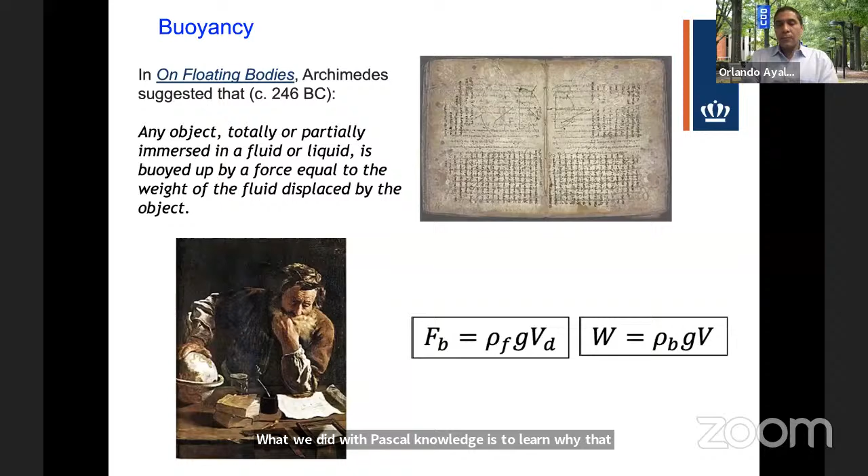Archimedes found that years prior to Pascal. He had no idea why that happened, but he was a smart scientist that studied nature and came up with an equation for us to use, and we still use nowadays. Notice, he wrote that equation 246 before Christ, and we still use it. What we did with Pascal's knowledge is to learn why that happened. But it's still the same equation.

And let me give you an example about buoyancy, which is related to one of the questions I got. And that is, again, the buoyancy force depends on the density of the fluid, and the weight depends on the density of the object, of the body.

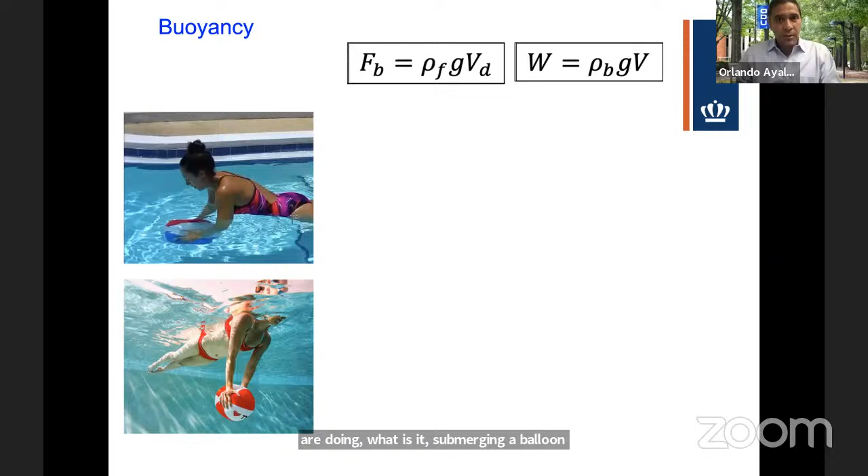Now, we all have done what the ladies in these pictures are doing - submerging a balloon full of air. You all have done that, or if not all of you, many of you have. You have grabbed your balloon, went to the swimming pool, and put it down, submerged the balloon. And you all know what happens - yes, this is what happens. So why did that happen?

Well, let's look at the equations. When I was holding that balloon under the water, there was a buoyancy force equal to density of the water times gravity times the volume of the balloon, or the ball, or the beach ball. And the weight of that balloon is equal to the density, but mostly the density of that balloon is mostly the material of that balloon, which is mostly air. So this is density of air, basically, times gravity, times the same volume.

Which one is larger? Well, the density of the air is about 1 kilogram per cubic meter, and the density of the water is 1,000 kilograms per cubic meter. So when you were holding it, there's a force that is about 1,000 times larger than the weight of the actual balloon or beach ball.

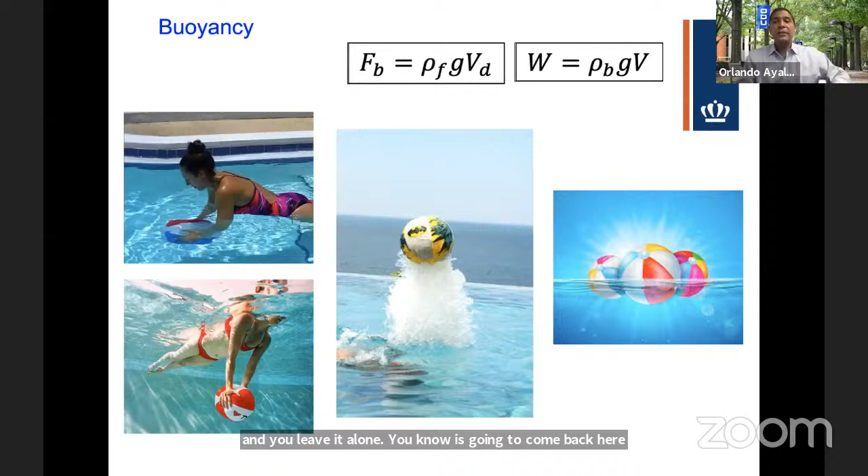When that happens, it's because the buoyancy force is equal to the weight. So the water is just pushing the ball up, and the weight is countering that force. And because they are equal, the ball remains stationary.

Now, why did it happen? Well, because Mother Nature is so smart. When that happens, Mother Nature adjusts how much of the object must be submerged in such a way that that happens. So this displaced volume is the key - that displaced volume is what keeps the ball or whatever object floating. Because at the end, the only way for that ball to be stationary is for the buoyancy force to be equal to the weight.

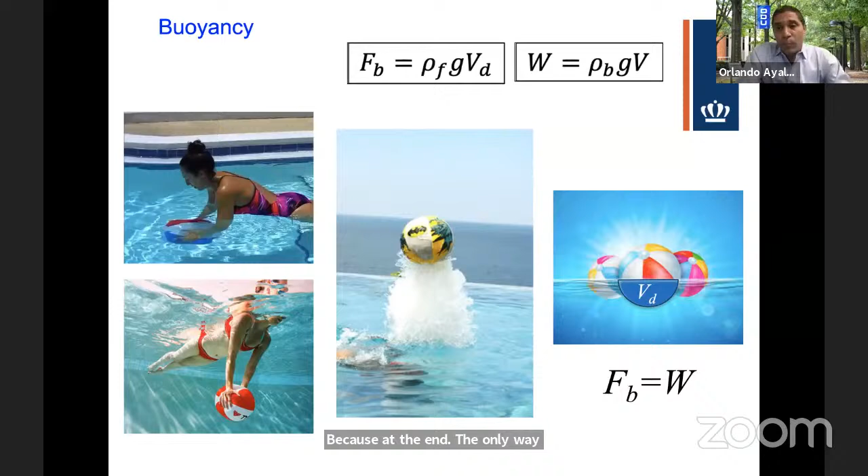Now, let's get into the stability and get very quickly into the lab so I can give you time to run into the virtual lab that we prepared for you guys. So let's run for stability.

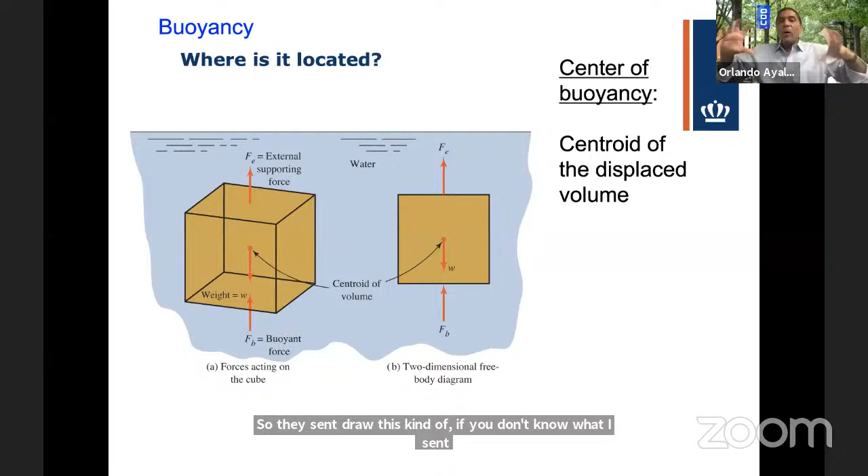But the stability is related to certain points that we define. And as we have a buoyancy force, we need to know where that buoyancy force is located, where that buoyancy force is pushing. What's the central point of that? The central point, we call it center of buoyancy, and it's nothing but the centroid of the displaced volume. So the centroid, if you don't know what that is, is basically the middle of an object - it's kind of the middle of the object to give you a sense of what that is.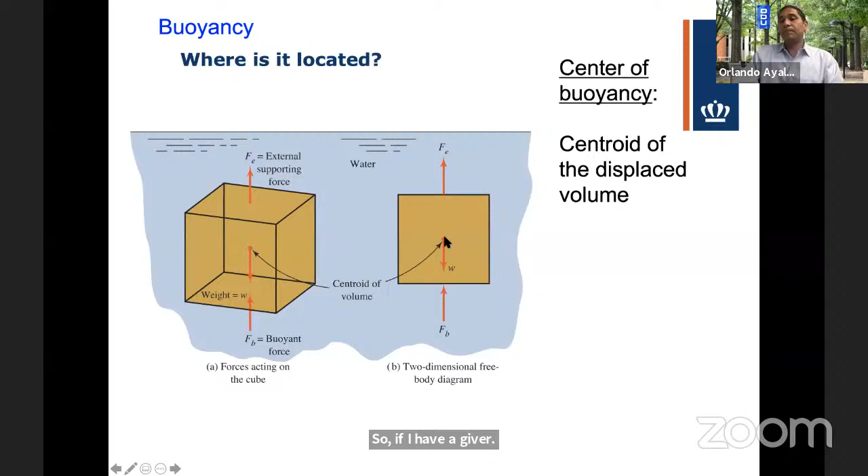So if I have a cube submerged, the centroid will be the middle of the object, the middle of the cube, right there in the middle.

Now, the center of buoyancy might or might not be the center of mass or center of gravity. So be careful. The center of buoyancy is located at the centroid of the displaced volume, whereas the center of gravity is located at the centroid of the whole volume, the whole object. When is a submerged body stable?

It is stable as long as the center of gravity is below the center of buoyancy. See, what happens is the following. Why do we want that to happen? Because the buoyancy force points upward.

Let me see if I can do some drawing. It's pointing upward at this point, whereas the gravity force, which is the weight, is pointing downward.

The advantage of knowing that is if the submarine tilts, goes sideways, there is a moment that will try to get the submarine aligned again. Why? Because the buoyancy force points upward right here, and the weight points downward at this point. By having those two located that way, if the submarine tilts, it will try to go back to its original position. So that is a stable body.

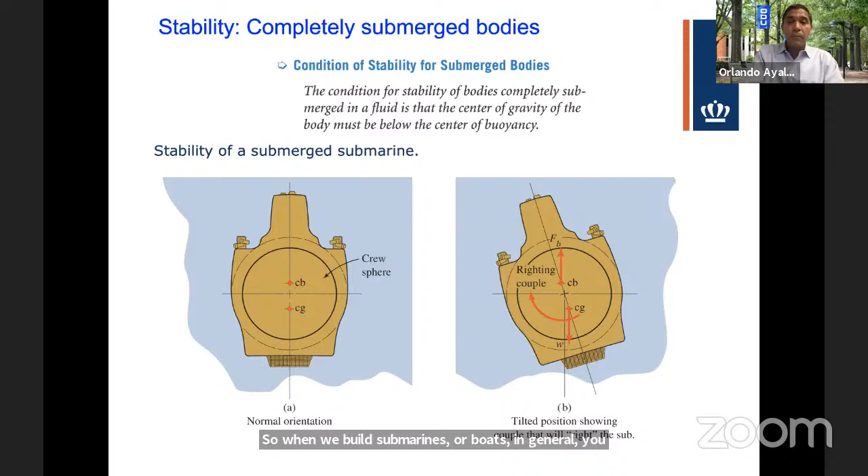If it didn't work like that, then the moment, what I call the righting couple, would be the other way around, and it would make the submarine turn and turn without stop. So when we build submarines or boats in general, you want to put most of the weight at the bottom, always.

So that is if it is fully submerged. When it is floating, things change a little bit. The relationship is no longer what we told you before. Now the center of gravity, instead of being below the center of buoyancy, must be below what we're going to call the metacenter point.

So we have to look into this metacenter, and the metacenter is a fictitious point, it doesn't exist. It's a fictitious point that we use as engineers as a reference, because we know that the center of gravity must be lower than the metacenter.

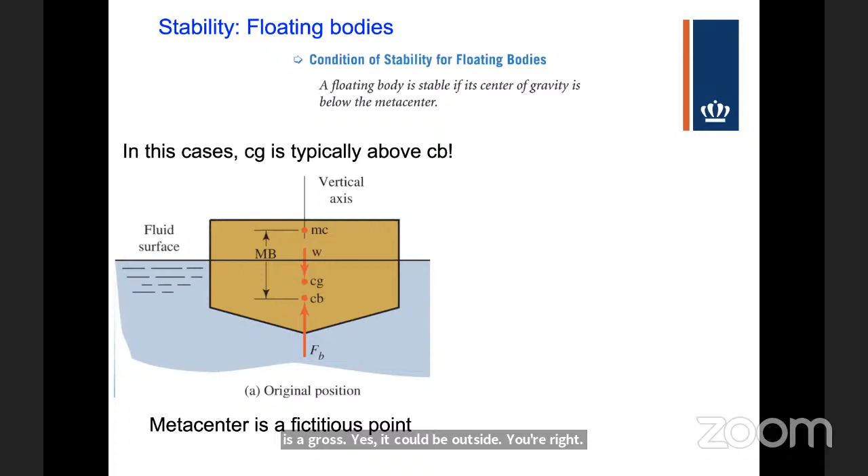Oh, yes. I'm glad you gave an example, because the answer to that is yes. Yes, it could be outside. If it is a torus, yes, it could be outside. You're right, good question. Definitely it could be outside. My intuition, my brain, intuitively answered no right away.

But then after your example, yes, it has to be outside, and it is outside. It is definitely outside, in that case, in the center of the torus. Good question, good question, and thank you for opening my mind. I didn't think about it, but yes, it could be outside, definitely.

Let's see, what else do we have? Okay, if it is floating, we're not comparing where the center of gravity is with respect to the center of buoyancy, but rather with respect to the metacenter. Now, the metacenter is a fictitious point. And by the way, the lab you're going to run into will teach you how we measure metacenter.

What I want you to do in the lab is get the metacenter experimentally and compare that value to the theoretical metacenter. The equation I'm about to provide shows how to obtain the location, by measuring the distance MB. MB is equal to the moment of inertia divided by the displaced volume, the same displaced volume we discussed before to compute buoyancy.

Moment of inertia, for those who do not know, is a property of an object that tells you how easy the object would turn, how easy it would be to turn around. The bigger the objects are, the harder they are to turn. The smaller they are, the easier they are to make turn. So the moment of inertia is just a fancy term to give us an idea of how easy it could be to turn an object around.

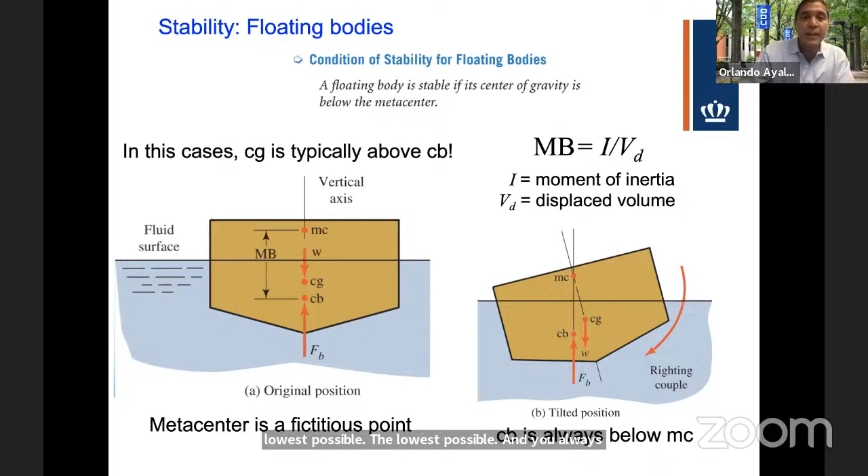And you always keep that in mind if you are designing a boat. That's what you always want to do. Now, I just told you that, and I'm going to get into explaining what you're going to be doing in that virtual lab we put together for you guys.

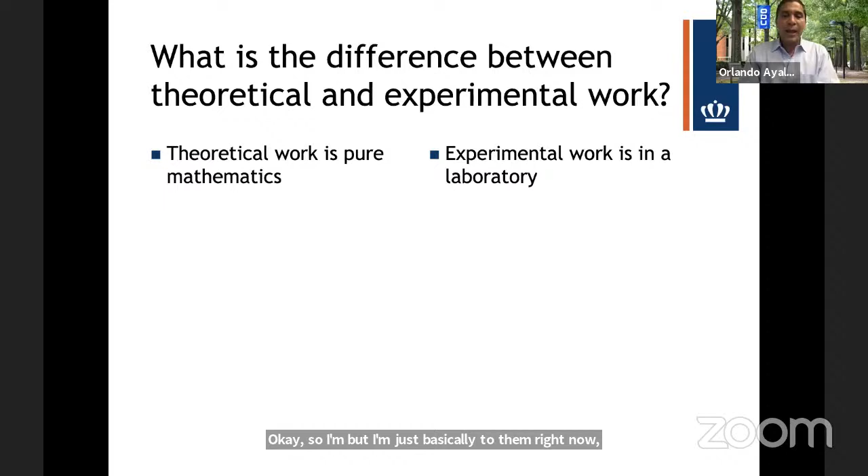That is, I want you to compare experimental work and theoretical work. But what's the difference between those two? In the theoretical work, this is pure mathematics, basically what we did today. So I'm just wrapping up to let you go and work on the lab. Experimental work is in the laboratory.

Another difference is that we predict magnitudes based on a model, based on equations. In the laboratory, we measure those magnitudes, and they depend on the specific case you're working on. In this class, I want you to calculate the location of the metacenter of an object I'm going to show you, and determine that experimentally so we can compare them against each other.

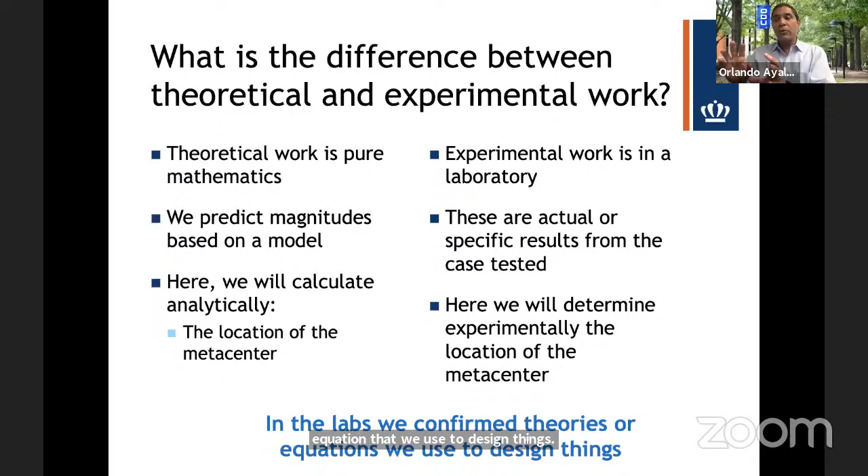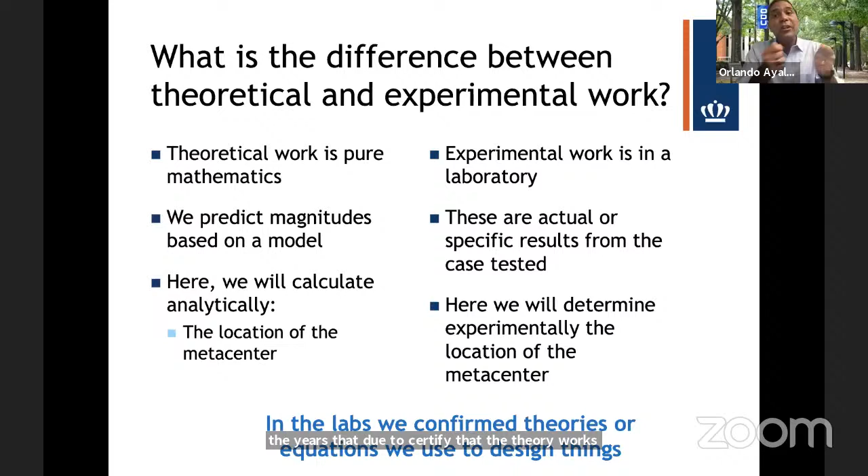So in general, in the labs, we confirm theories or equations that we use to design things. Even though I want you to work on something not directly related to a design, I want you to prove that the theory works. It's important for us as engineers to certify that the theory works, because if the theory doesn't work, we cannot use the theoretical equations to design anything. We cannot, we should not.

So what are we going to do? We're going to collect and process data. You're going to be facing this floating vessel that has a weird shape, but the important thing is that the base is just a kind of square shape, okay? On top of that, we have this device that we made just to be able to move what we're going to be calling the movable object.

This right here is a movable object that we're going to start moving around to take some measurements, okay? Now, the experiment you're going to run will provide you data that allows you to compute the metacenter.

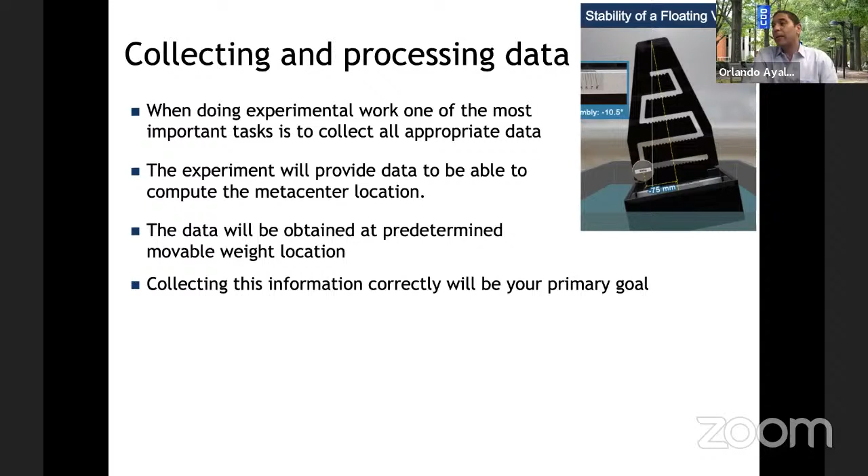In the slides here, I give you precise instructions on how to use the experimental data to get the meta center location. The data will be obtained at different locations of the movable weight that I told you before. Your primary purpose in the lab is to collect that corresponding data. By going through the videos, you're gonna be grabbing those values, and then you'll use that data to introduce it into an Excel spreadsheet that I put together for you to use.

And Tyler, is there any other question? Yeah, we have a couple. So from Esha: is the meta center related to the center of inertia?

It is related because, at the end, center of inertia is also related to the moment of inertia. So yes, I would say that they are related, definitely. Because once again, that meta center is related to moment of inertia. The moment of inertia is a term that tells you how easy an object can turn, and the turning is always around the center of inertia. So yes, they are related.

And then from Callie Ferguson: what does MB stand for again? MB is just a distance, and it's a distance from the center of buoyancy to the meta center. Once again, I want to remind you that the meta center is a fictitious point. All right, so let's get into this.

The results are gonna be presented in both numerical and graphical format, so please use the Excel spreadsheet. And if you do have any question, please feel free to ask me. So what are you gonna do? You're gonna collect data, and the data is the total mass of the floating assembly.

When you go through the video in the virtual lab, you're gonna be given that information. So pay attention to the video and start grabbing all the information that you need. You're gonna need the total mass of the floating assembly, the weight of the movable weight, which is this guy here, the breadth or width of the pontoon — the pontoon is this whole thing — and then the length, which is the distance into the picture here.

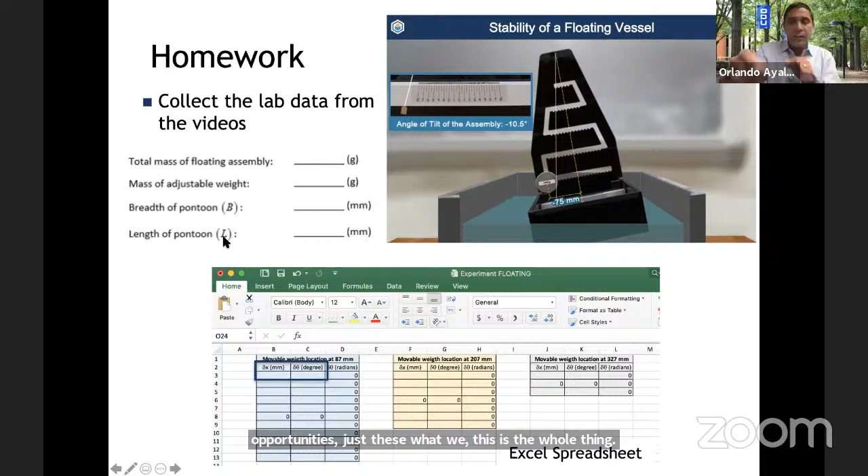You're gonna also be collecting data to fill in the tables here. Look at the bottom — this is the spreadsheet I'm gonna provide to you. What I want you to do, as you move along into the video, is start collecting the data, start collecting those angles and distances as you go, and put it into this table.

So fill in the first table, which is moving the object in this slot. You move this weight left and right, and as you do, you're gonna be reading angles and reading distances. Like in this case, the distance is 75 millimeters. So you're gonna collect the data and plug it into the table.

Then you're gonna fill out the second table, which is when the weight is on the second slot. The first table is right here, this slot; the second table is for this slot; and the third table is right here for this slot, right at the top. So we're gonna just measure 3 slots in the video.

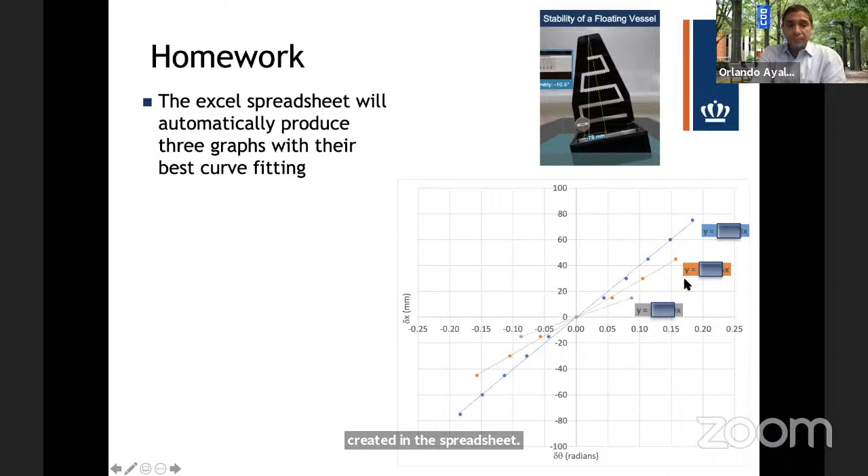Now with the data, you're gonna produce curves of this kind, which are already automatically created in the spreadsheet. The spreadsheet will automatically give you 3 values right here that I'm hiding from you so you can read them on your own. So you're gonna read those values next to the lines, and use those values for the following process.

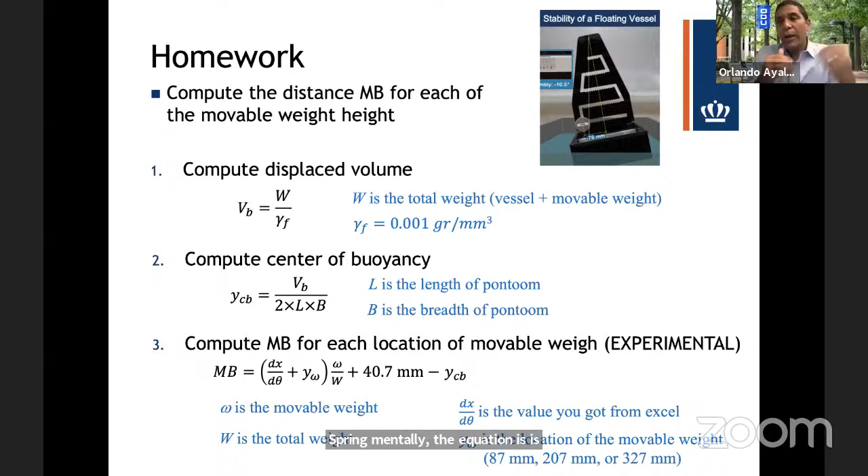So you compute the distance by following this step by step. You first compute the displaced volume, then compute the center of buoyancy, and the equations I'm using right here are basically the equations I provided during class. Then you compute the MB. Now for that MB distance, experimentally, the equation is totally different, unrelated to what I taught in class. In class, I taught you the theoretical equation.

Experimentally, there is some trick that needs to be done. I'm skipping those tricks and just providing you the equation you use to get MB with experimental data. After you get the result from Excel, you're going to use those values, plug them in here, and see what value of MB you get for the different locations of the movable weight.

Then finally, I want you to compute the theoretical work using the equations I taught you half an hour ago. Your goal will be to compare the MB values you get out of the experimental equation to the equation on this slide, which is theoretical. I want you to compare all those values against this one.

The question I want you to answer is whether they are the same or whether they're similar, and what can you comment? If they're the same, are you happy with them? If they are similar, would you be happy? Those are the questions I want you to answer.

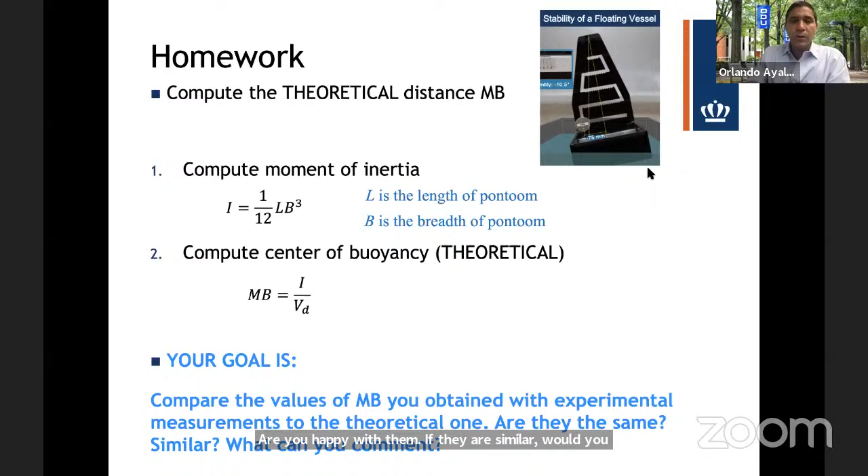To get into that, we're going to use a Blackboard system. Let me paste this on the chat group.

Let me, where is it? Here we go. Let me paste this in the chat so everybody can access it. Where is the chat? Right here. So we don't have a chat room right here. Oh yeah, we do, sorry. So to all the attendees, here we go. This is the link, so all of you should have access to it. Let me get a new chair. It should look like this.

And while you're loading all this, we have a couple of questions. So go ahead. Syed Gul asks, how will we submit our homework and when is the due date for it?

Oh yeah, the due date, I'm not going to put pressure on you for due dates, so feel free to send it to me whenever you could. Let me put my email in the chat. Send it to me by email. If you have questions, just let me know, just shoot me an email and I'll work things out with you.